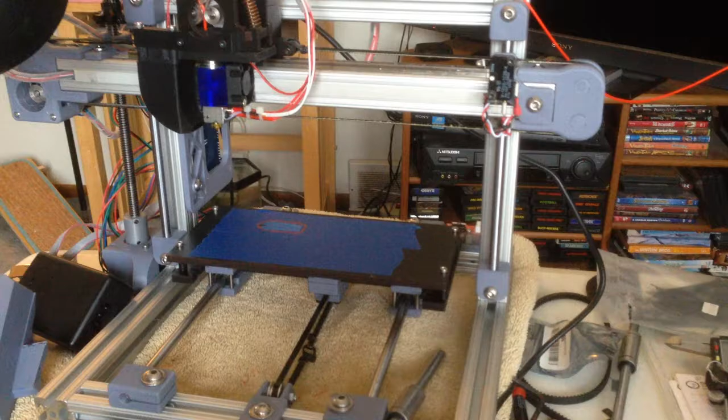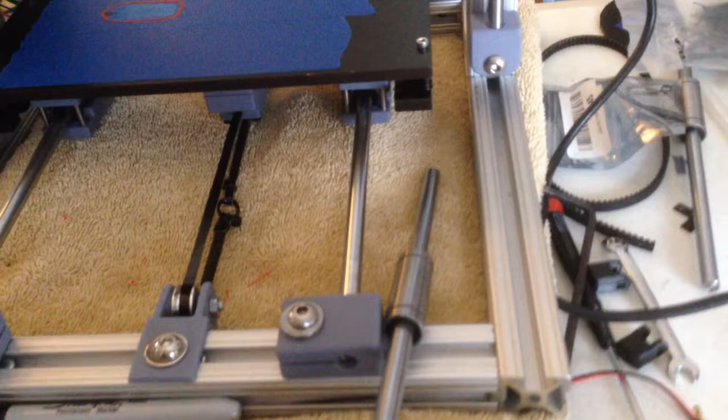We had a small amount of discussion last week, Tim and Ron and I, about how to best design parts for 3D printing to create something or build something. So I wanted to just real quick walk through the process that I used. Maybe people would find that helpful.

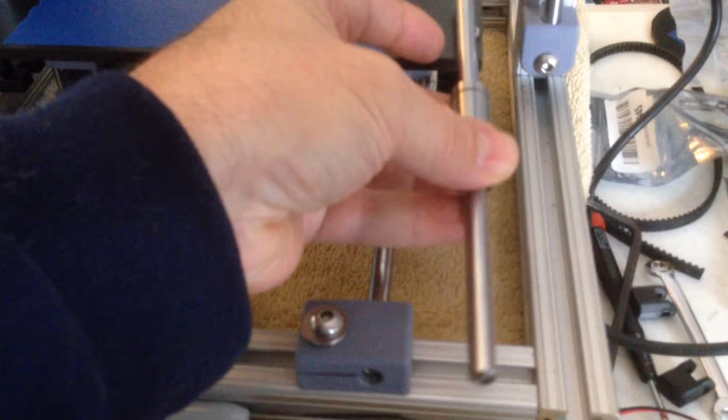So how do you take an 8 millimeter shaft and end up with a part like this here or these here that connect the two in such a way that when you print it, it actually works.

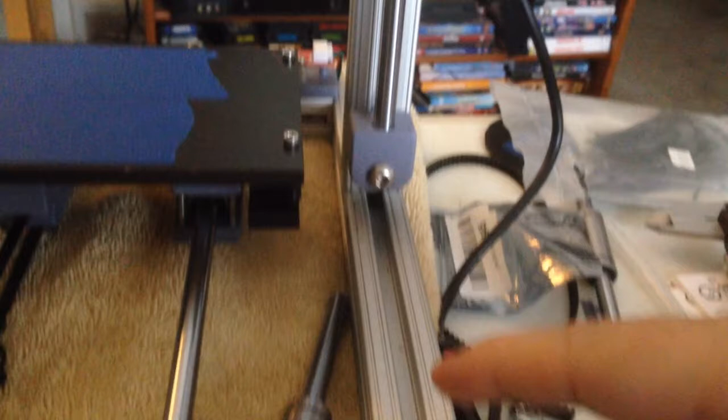So the first thing I do, and the whole process here is going to be that I actually create the parts that I want in my 3D modeling software so I can connect them together with another part. So my aluminum profile and my shaft and my bearings, all those kinds of things, I would take my caliper

and measure it and say, okay, my profile here is 25 millimeters square, my shaft is 8 millimeters, and my bearing is 15 millimeters. I would take those measurements and write them down somewhere, sketch them down if I had to, but then I would bring that over into my Fusion 360 modeling software and start to build it from there.

I'll go through some of what I think are key things to know while I'm going through how to make this part. So you start with a component, and you can build inside this component.

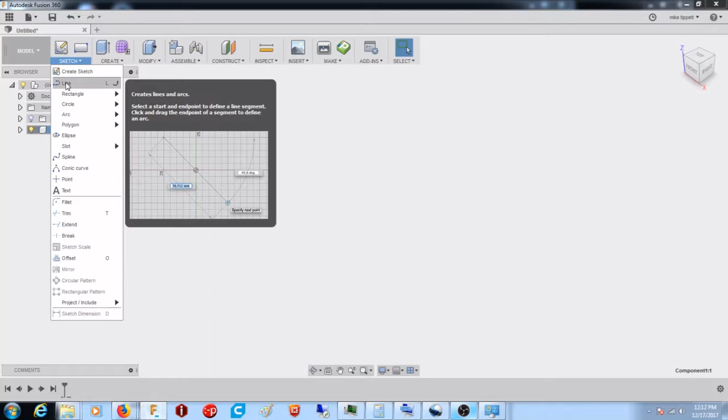So to create a part, you can click on sketch. You start every part by clicking on sketch. And you've got different options. You can draw a line or different types of rectangles, different types of circles. You can play with those. I'm just going to start with some simple things.

So I'm going to create a circle, and I'm going to create a center diameter circle. I could do a 2-point where it draws a circle between 2 points. You can figure it out. Okay, but center diameter circle, and then it wants me to know where to start drawing.

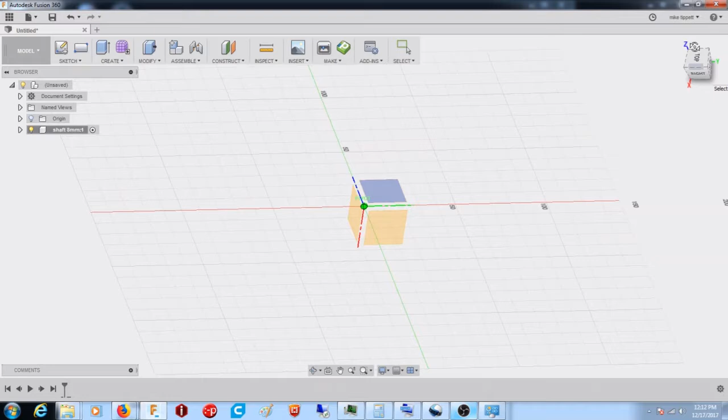So something that took me a while to figure out here are planes. It says select a plane or a planar face. So it's basically saying, where do I want to start drawing if I have a three-dimensional image? If I click on this thing here, you can click on it, drag your image around to show different perspectives of it. Or you could also scroll click on your mouse or trackball, and you can do the same thing.

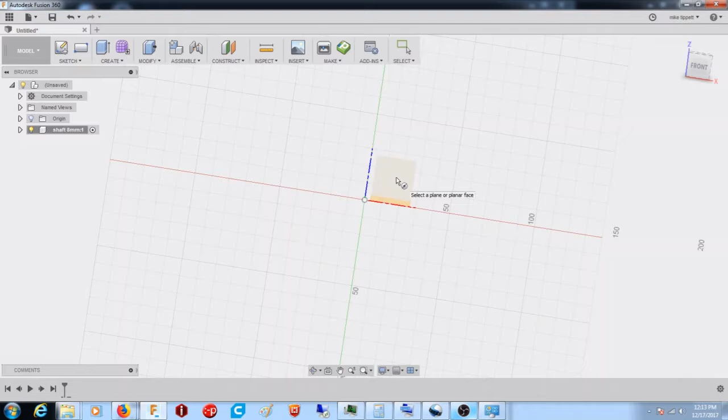So it's asking me, where do I want to start drawing? What plane, what surface do I want to draw on? If I had a cube here, what side would I want to draw on? So if I click top, I'm going to be looking top down on my part. If I started here on this one, I'd be looking at the side or the front of the part.

But I'm going to start drawing the shaft from the top. So if I click on the top here, it'll center everything for me. And when that turns from blue to yellow, I've selected that plane. I click it, and now this is the center of my drawing area.

So I'm going to click release to set my center point, and then it says specify diameter of circle. So I can drag my mouse out, or not drag, I'm just moving it because I released the mouse. But it also shows me the value of that, and when it's highlighted, I can just type a value and hit enter again, and now I have an 8 millimeter circle.

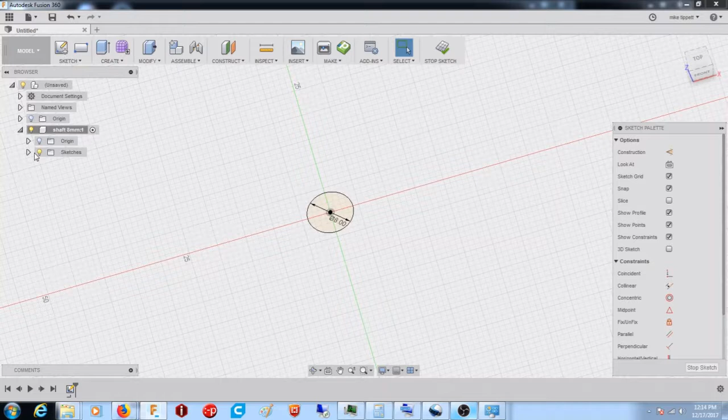I can use my scroll wheel to scroll in here. That's the easiest way, and click the scroll wheel to drag it around. So I've got a sketch. If I come over here to my part name here and expand this, I've got sketches here, and it shows me all of my sketches, and this is a sketch that I drew. I can click the little light bulb to make it disappear, which is handy later on, but that's my sketch.

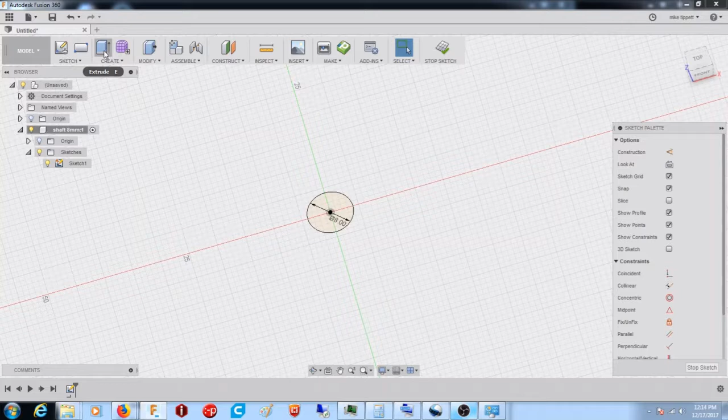I want to create an actual part out of this. I want to create a shaft, so I'm going to click on Create, and Extrude is the default. Like if I hit the letter E, it always gives you your shortcuts there. I'm just going to click Create and click release on that part, and it gives me an arrow here where I can click and drag that, and I can go in the negative direction or positive direction, doesn't matter. The text is blue, so I can type a value in there as well.

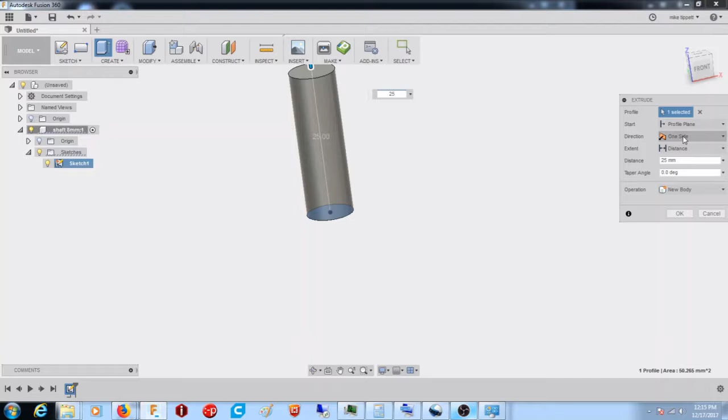I have different options over here, whether I can have a one-sided or two-sided or symmetrical. Symmetrical, it'll create a part on both sides. You can play with that, but there's my part. There's my 8mm rod. It's 25 millimeters long, so I've created that part. That's critical for making the pieces that I want to join this part to something else.

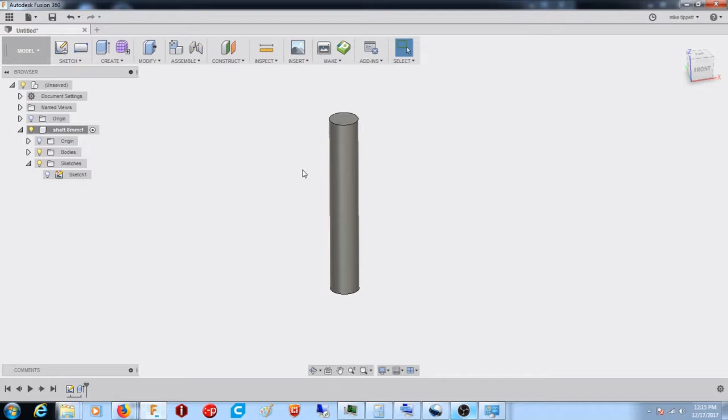So my bearing that I measured was 16 millimeters. So I'm going to come up here and click on my main part here and select New Component. So now I'm going to select that and call that bearing. So now I've got a new different part, and it still shows my other parts. This little Activate Component here allows you to determine which component you are working on at the time.

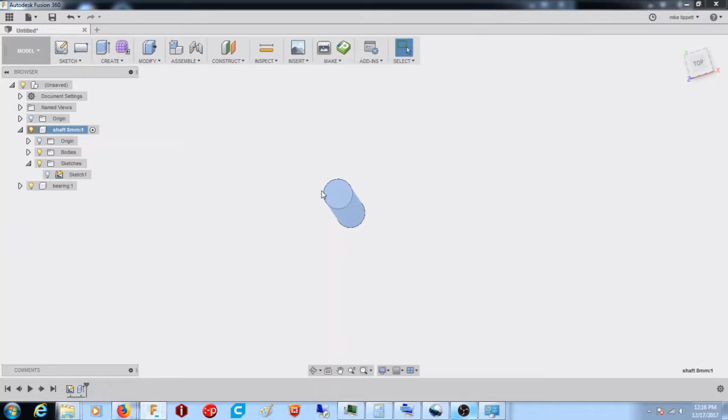So you see how my shaft is no longer activated. If I click that, my shaft changes color and shows me that it's the one I'm working on. But I want to work on bearing. So I'm going to look straight down on the top. I'm going to go to Sketch and Circle. I'm going to do a center diameter circle again, and it's going to ask me to select a plane or a planar face. So I've got two options here.

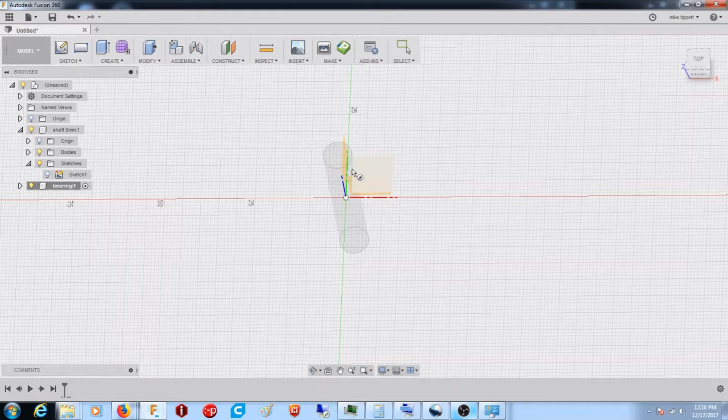I can pick this plane in my XYZ space, or I can pick the top of my part here. That's a planar face. It's a flat space, it's not curved, along a plane. It matches the same plane here. So I click that. Now it says place center point. I'm going to scroll in here, and you can see that I've got crosshairs in a square box, but if I hover that over the center of my circle there, it gives me a round circle instead of a square box.

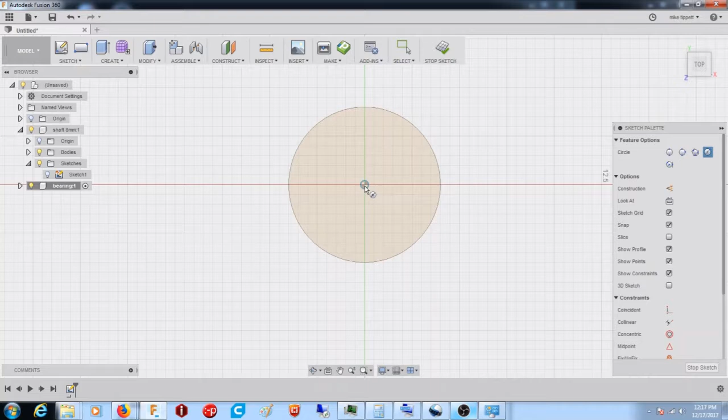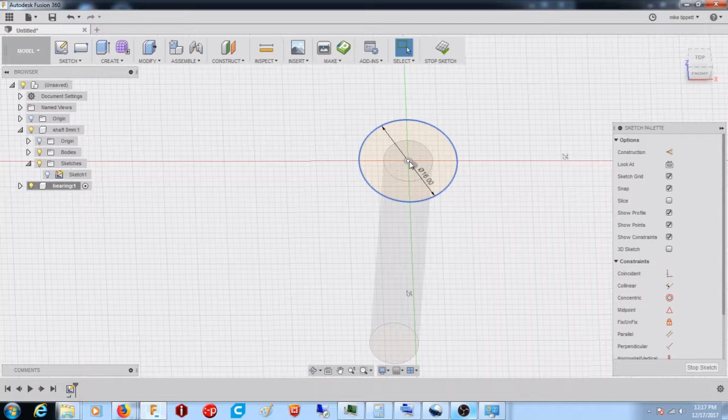It's hard to see. But place center point, I'm going to click, and I'm going to drag out here, and I'm going to make that 16 millimeters. So now I have, let me scroll out, a circle based off the center of the part behind it, and I can select that, and it's just the expanded part of that, not the inner part. I could make it the inner part, the shaft part, but I'm not.

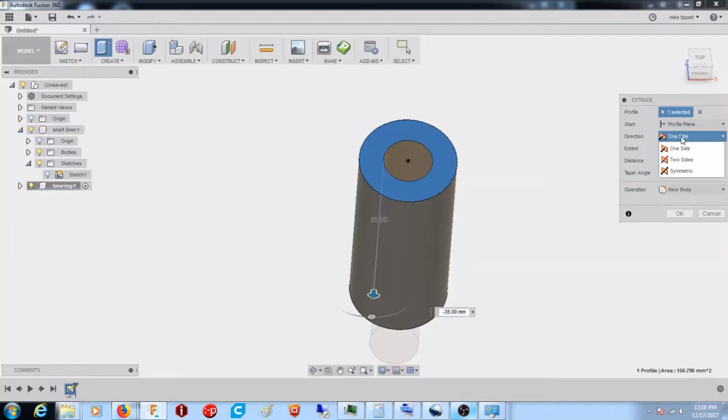So click Create and Extrude, and I'm going to extrude this down, and this was 35 millimeters, but if I wanted to, I could also make it two sides. Now I could extrude this way as well. So I'm going to make this 35 millimeters and hit enter. Oh, I forgot one key thing. No, I guess it doesn't matter in this case.

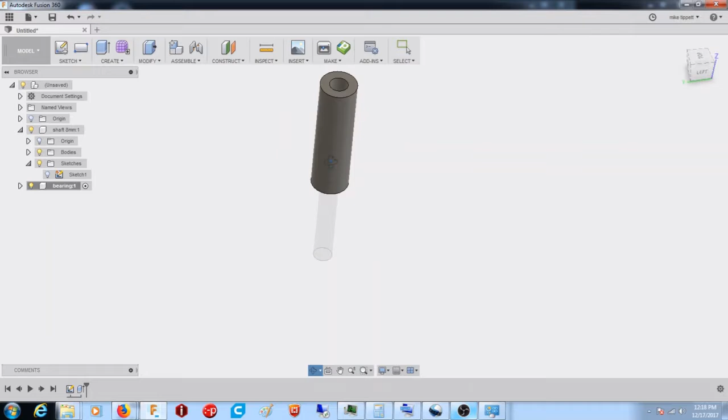Okay, so now I have my bearing, and I have my shaft behind it. I can select it, but I can't edit it. So here's my bearing. I want to move that bearing so that it is centered on this shaft. So I'm going to right click on it, pick Move/Copy, and I have the option to select a specific face of something, but I really want to move the whole thing. This is a body now because I have extruded my sketch into a body.

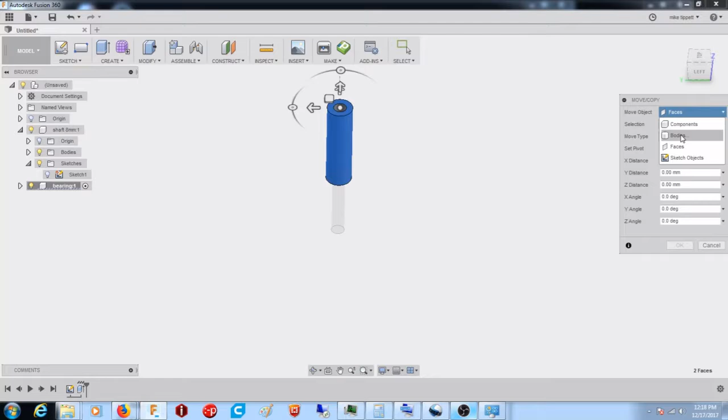So I'm going to select Body, and I'm going to center my view on it and click this arrow. Now I could rotate this body, I could do all kinds of things with it. I don't want to. I just want to slide it down so it's centered on the shaft a little bit more. Shaft's not big enough. So I'm going to click OK, and that moved more.

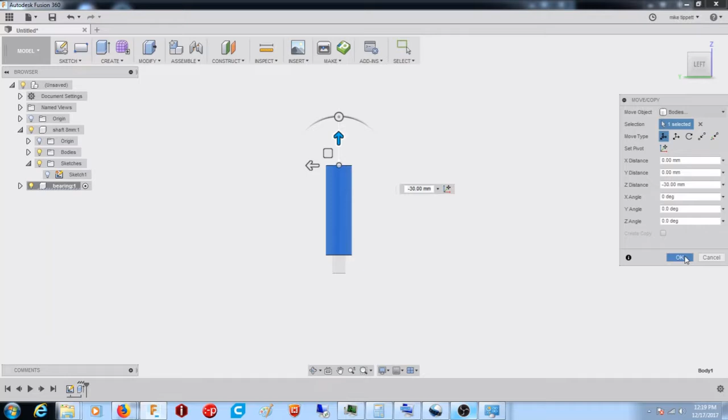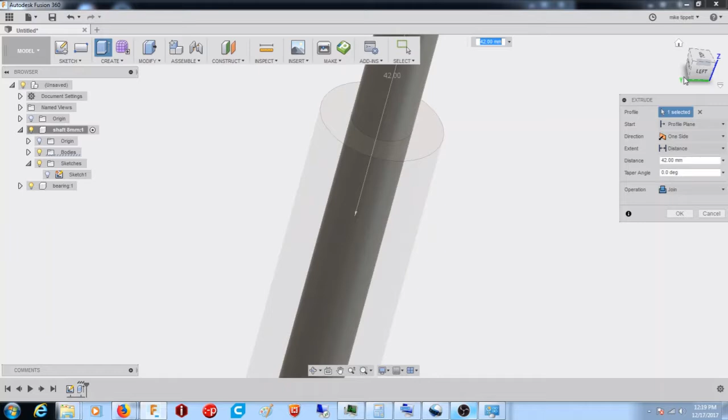So I'm going to go back to my shaft. I'm going to make that active. I'm going to scroll in here and click on the top of that. So just the top is selected, and Create. I'm going to drag that up so that it extrudes out of both sides of the bearing like that. Doesn't really matter how long this shaft is.

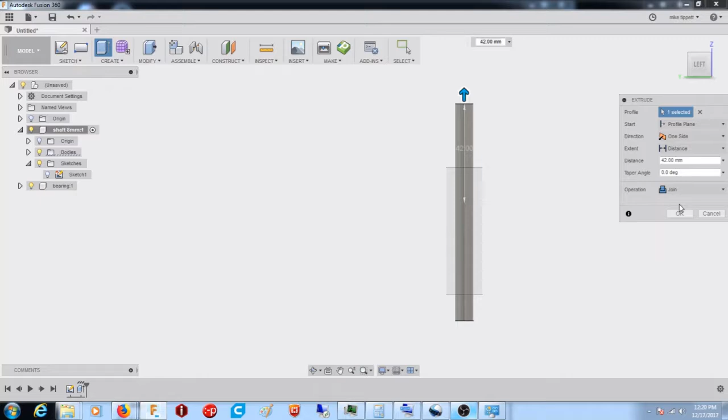And I'm going to join it to the previous part. If I said I wanted to cut, it would cut; I'll go back to that in a minute. I could join the previous part, or I could make it a new body, and there's a line separating them, so now I've got two separate bodies here. I want to join this to the previous part. So now there's my 8mm shaft. It goes all the way through my bearing.

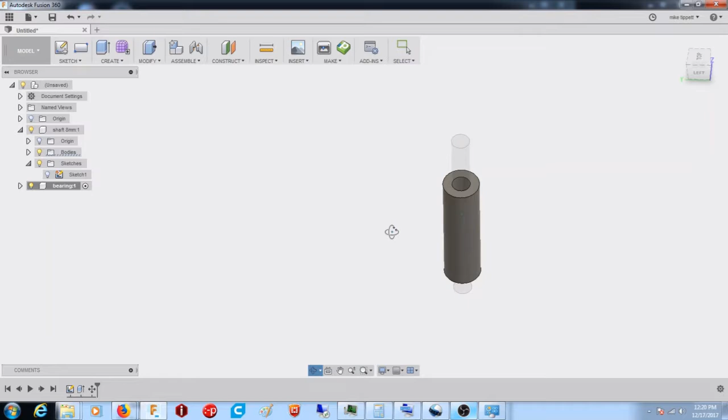If I select my bearing to make it active, there we go. So I've now created a shaft and a bearing that I can attach something to. So that's how I would build these parts, and then figure out how I wanted to attach them. It's a whole lot easier if the parts are right there on the screen and you can build from them, rather than trying to guess at what you're doing.

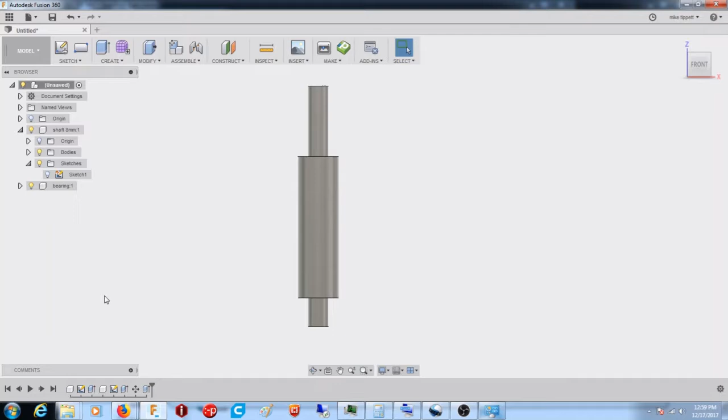All right, so now I've got my part. I want to put another part on there and join the two together. So I need to create my aluminum profile, which is part of my printer. So I made a new component. I'm going to call that profile, and now I'm going to draw that. So again, to draw a part, I want to pick Sketch. I'm going to pick a center rectangle this time.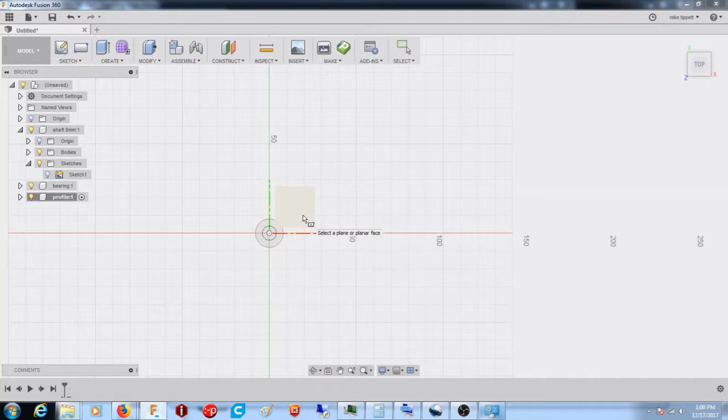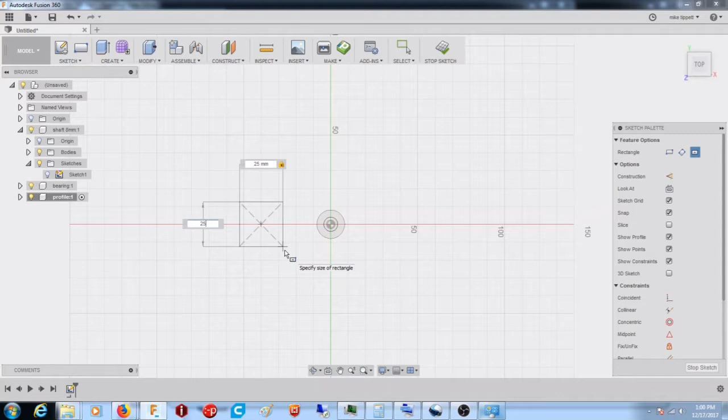It's going to ask me about a plane or a planar face, so I'm going to just pick my plane to click on, and I'm just going to pick a spot that's centered along the part here, to make it easier, and then specify size of rectangle. So I clicked, I moved my mouse, and I'm just going to type 25 and 25. That's the size of my profile. Hit enter, and now I have a sketch that is the size of the profile from the end.

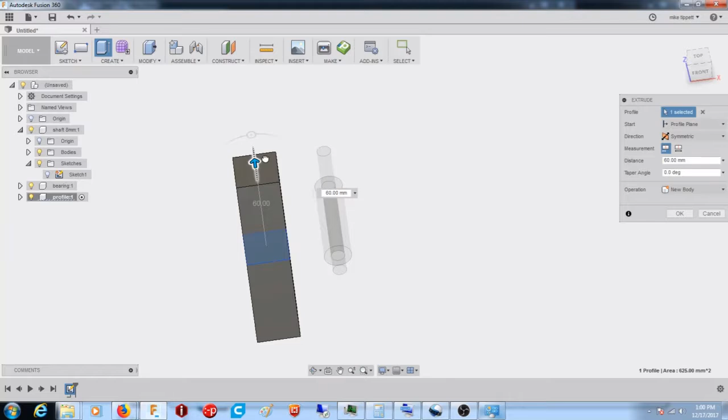I want to create a body from that, so I click extrude, I select it, and I extrude that into a body. I'm going to say symmetric, so it extrudes from the bottom and the top the same way, same motion. And I don't want to make this a new body. Oh yeah, this is a new body. I just created this. So click OK. There's my profile. So it's a representation of my profile. It's not very accurate, obviously.

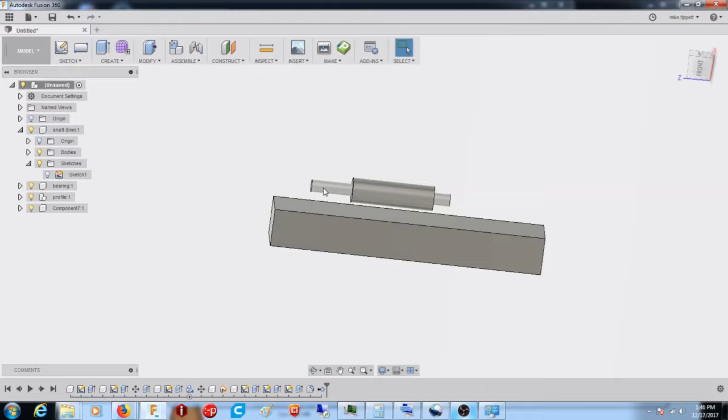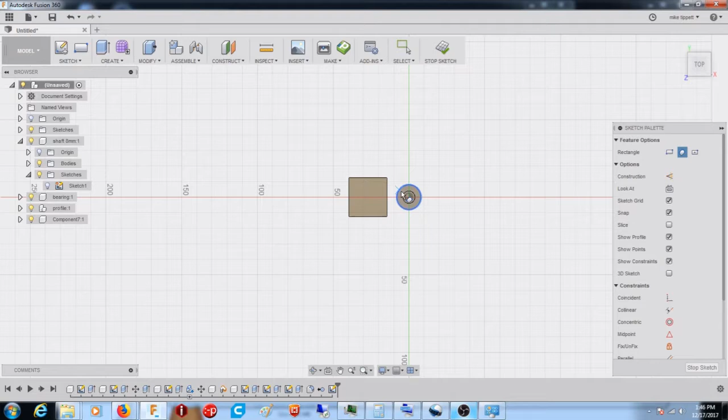All right, so I've got my aluminum profile. I've got my shaft. How do I connect the two together? Well, this is the methodology that I used as I was creating this. And so for every part that I made, this was the method that I used, and it worked really well for me. So I'm going to create a 3-point rectangle. I'm going to use the top of my profile as my planar face to draw on. And you can see how the cursor snaps into the corners.

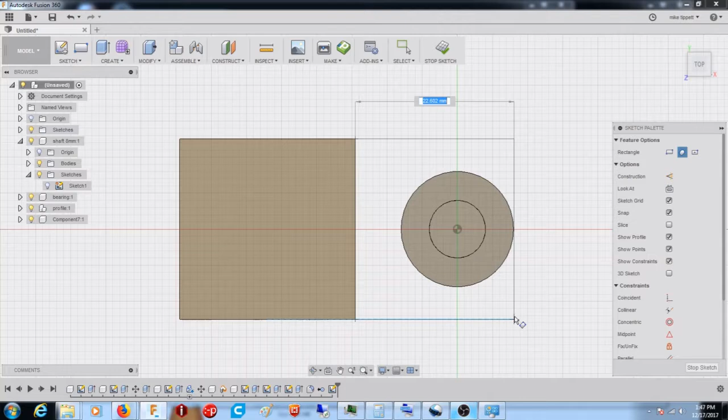So there's my first corner, I click, there's my second corner, and how big or small you make this part is totally up to you. You can change it later. You can edit the part once you've created it, so I'm just going to make it as far out as my bearing there. So I click, there's my face there, or my sketch. I'm going to stop my sketch.

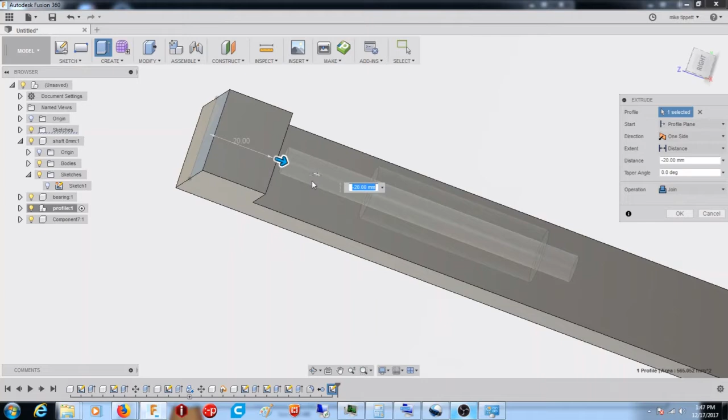I'm going to create that sketch into a body. So if I zoom in here, let me line this up. So there's the length of my extrusion here, or my extrude. So 23 millimeters, minus 23, is the edge of that shaft.

I'm going to decide that I want to go 10 millimeters into that. So I'm going to say 33 millimeters is how far I want to extend over that shaft end. That's probably plenty, so I can change it later if I want to.

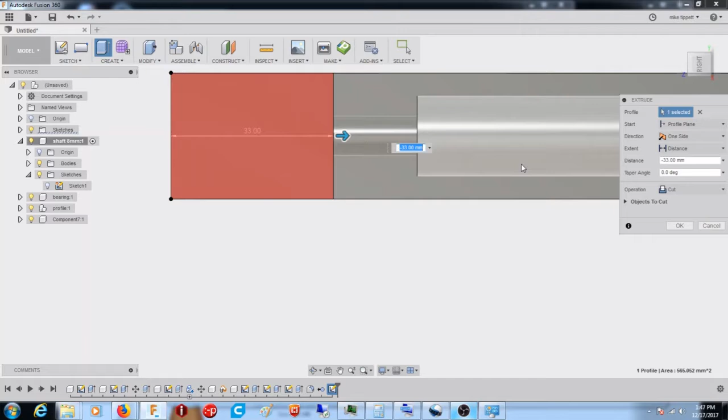So I don't want to cut. It's determining that because I went into a part, I'm going to cut. I don't want to cut, I want to make a new body right there. So that's my new body. I click OK, and it's separate from the shaft that's there. So, okay.

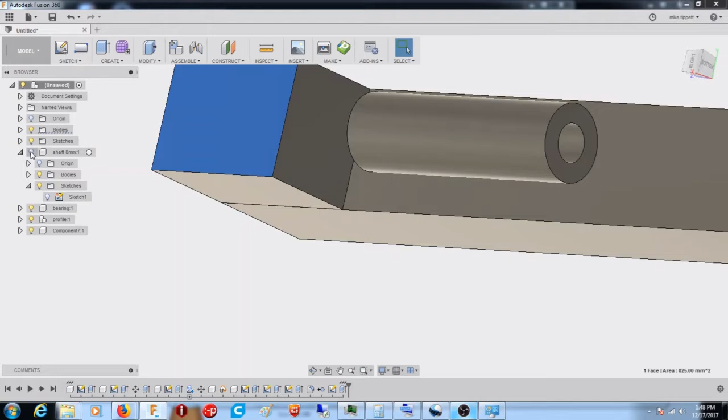If I make my shaft invisible, you can see there's actually no hole there. It just created a block. I want to actually make a hole for that shaft. So I'm going to zoom around to the top of my part here. Okay, I'm going to create a circle. I'm going to pick a 2-point circle. I'm going to pick the top of this profile here.

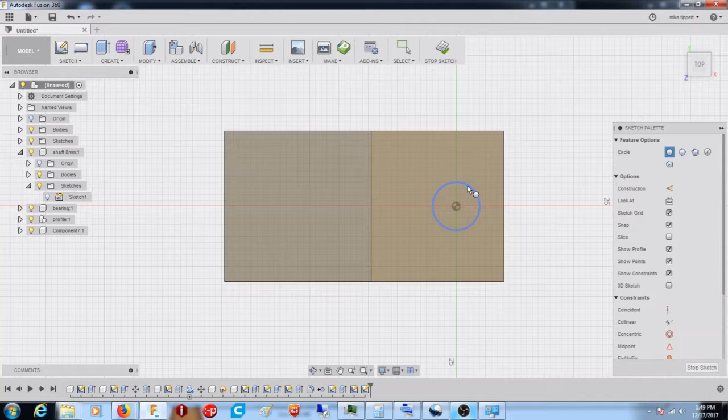And you can see as I move my cursor around, it's going to show me the edges of what's underneath it. So that's the edge of my bearing, that's the edge of my shaft. That's just fine, that's what I want to see. So I'm going to click on that, and it's going to draw this circle, and it's going to snap to that other piece behind it.

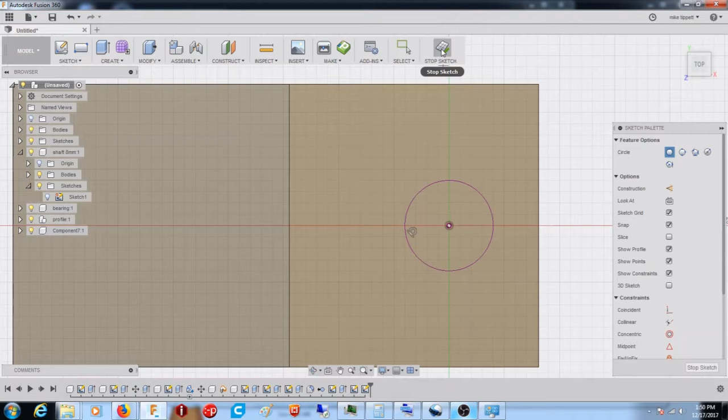Now it's 8 millimeters, which is the size of my shaft, so that's perfect. So all I have to do is type 8 millimeters, or I can just click on that once it snaps to the outline behind it. And I'll stop my sketch, and there is a sketch the same size as my 8 millimeter shaft. I'm going to create... There we go.

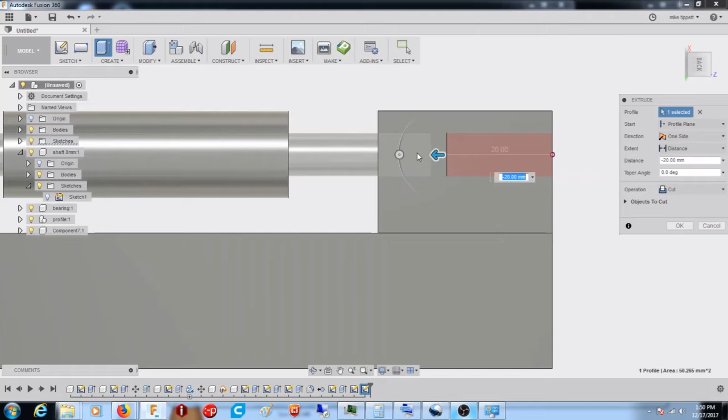And as I move back into this part, if I move this way, it would make a new part and join to this block, or I can move back into it and it automatically assumes I want to cut. So 33 millimeters was where that shaft started. That was the number I had. I'm going to make it 20 just to give myself a little buffer room there in case I need to fudge something a little bit.

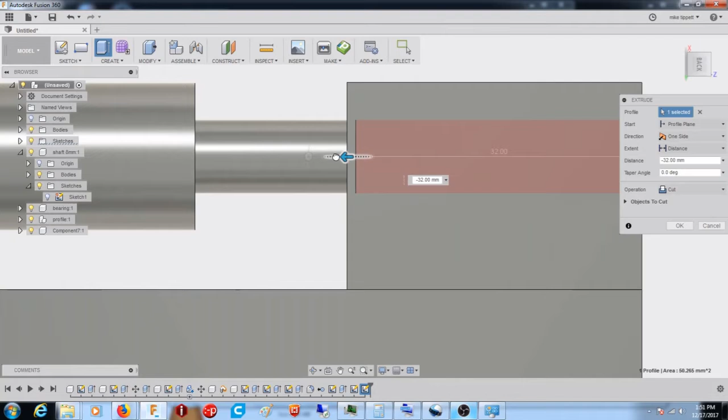So you can see the edge of the shaft right there, and here's where my... oh wait, no, I need to go all the way to it. What am I doing? So I need to go all the way through this, and I can drag this body all the way through, but it's going to cut off part of my shaft if I do that, and if I decide later to change the size of this block, this 32 millimeter extrusion is going to be the same. So I could later change the size of this block and this hole might not go all the way through it.

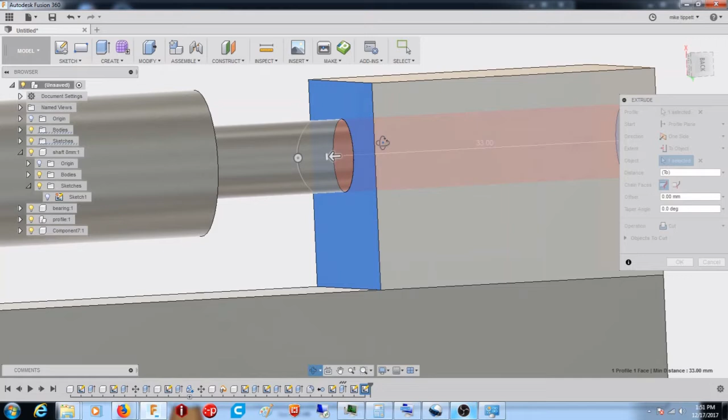So what I want to do is instead of distance, I want to pick to object. I want to pick the edge of this object, so that extrusion always goes right to the edge of the object. Even if I move it later, it'll still follow that. So it's totally fine. That's what I want to do.

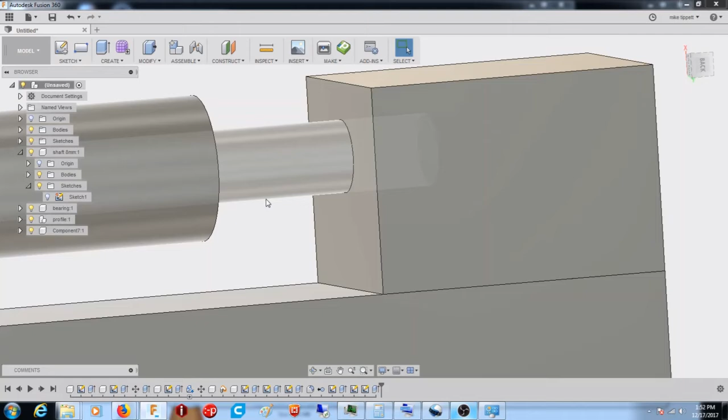Now again, if I click OK right now, it's going to cut through that shaft as well. I don't want that, so I'm going to make my shaft invisible, and now when I click OK, it's only going to cut what is actually visible right now. I'll make my shaft visible again, and it fits all the way into that hole, but it didn't cut through it. So I learned that the hard way. So now I've got a hole that goes all the way through my block there.

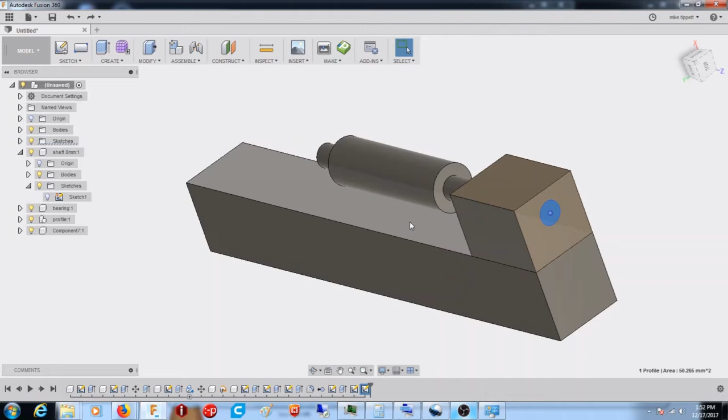There we go. So now, did I want it to go all the way through the block? I actually didn't, because later on I'm going to have to put a hole right here that goes down into my extrusion. So I'm going to undo that. There we go. I'm going to click that. I'm going to create. I'm going to say 20 right there. And I'm going to make this, instead of one-sided, two-sided. Oh, wait.

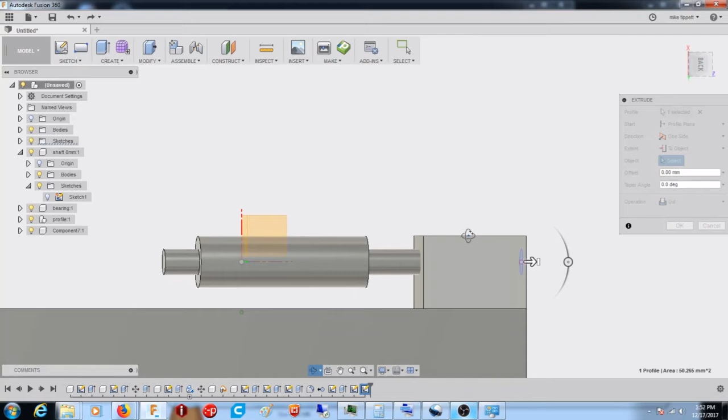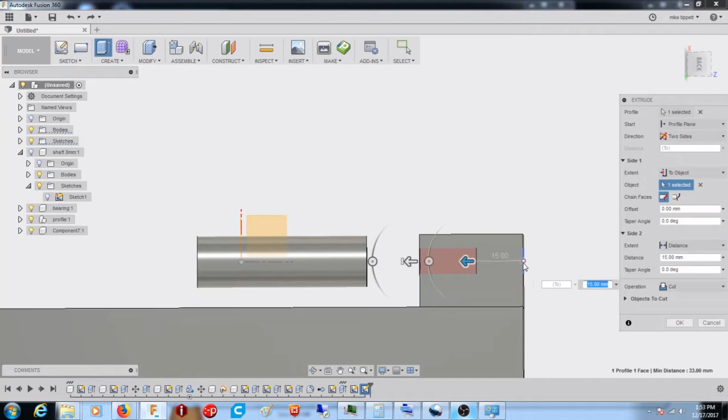One-sided. I want my extent to be to object. There we go. Let's go ahead and make my shaft invisible so I don't forget. And now I'm going to make it two-sided, and this side I'm going to make it go in, let's just say 15 millimeters. All right, it's going to be a cut. There we go. 15 millimeter hole. Only goes in not quite as far as the shaft.

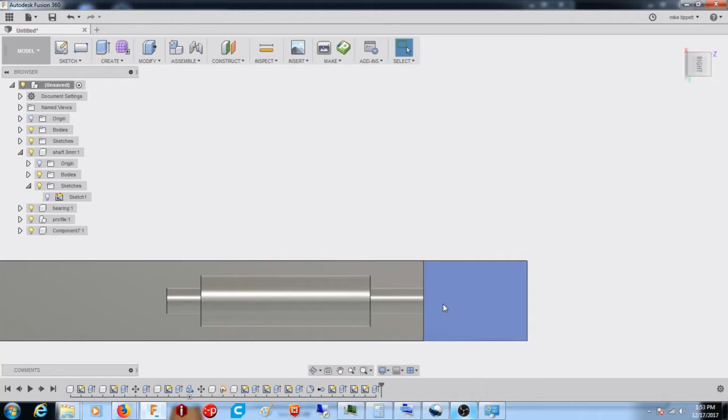So there we go. So now I need a hole through the top here. Okay. So let's see. So an easy way that I have found to create a point for a center hole is I'll go to Sketch and Rectangle. I'll make a 3-point rectangle. I'll use this face to draw on.

And I'll click on this corner, and this piece is 25 millimeters wide, so 12.5 is the halfway point. I'll click that, and I went 15 millimeters, let's see, 15 this way. So just to keep things centered, I'm going to type 7.5 millimeters and hit enter. And that right there is my corner where I'm going to put my circle. So I can click, and there is my spot.

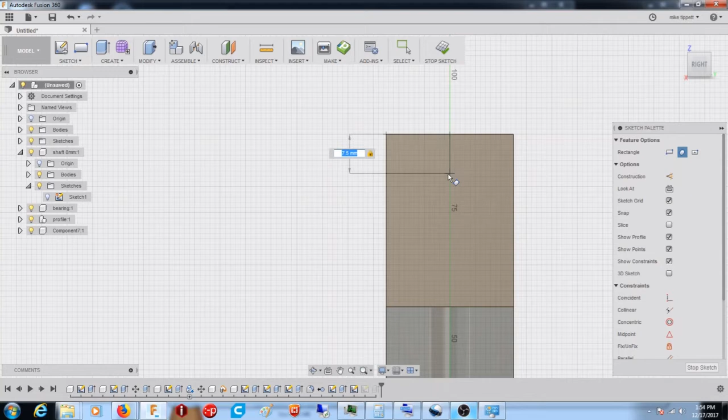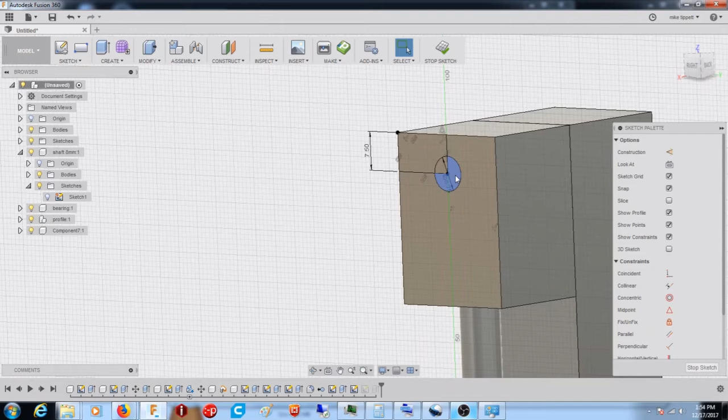I'm going to pick circle, center diameter. I'm going to snap right to that. And 6.75 has been the optimal size for me for printing holes through these blocks that my 1/4-20 screws can go through. So you'll see that it split it into two sections there because of the rectangle. Doesn't matter. Create extrude. I can click that, and it allows me to select more than one. So now you see over here it says 2 selected. 1, 2. I'm going to extrude that.

Now, what I want to do is extrude it just like before. I want to pick to object, and I want to pick it to the back side of this, but I can't see it. Neat feature about this is if you hold down your left click, it will show you all the faces and features that are underneath wherever your mouse is, and you can see the colors change a little bit. So there's the face, the back side of the profile, and you can see things changing.

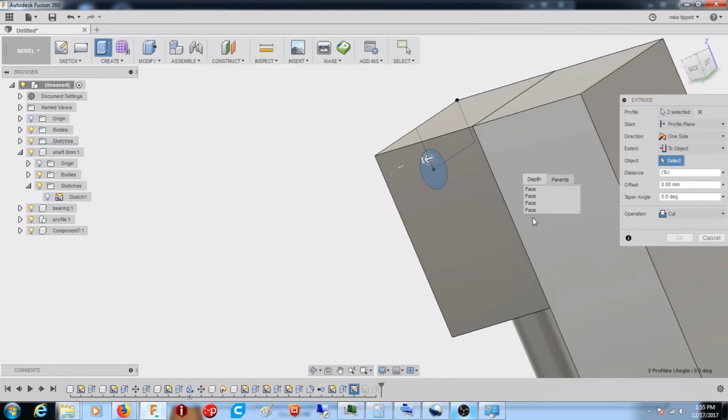I think right there is the back side of my block. There it is. So now it'll only go to the back side of that block and not cut into my profile. Click OK. Now I've got my hole all the way through. That's a functional part right there. You could call it done, or I could make it look prettier. I could add a chamfer to my edges here if I wanted to. A chamfer is just an angled edge. If you want to add something like that, you can.

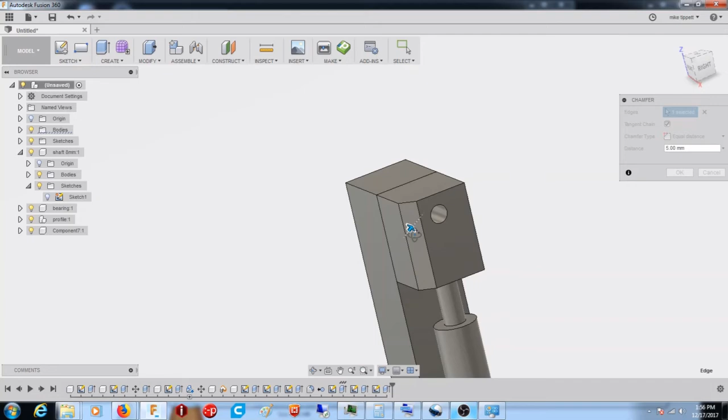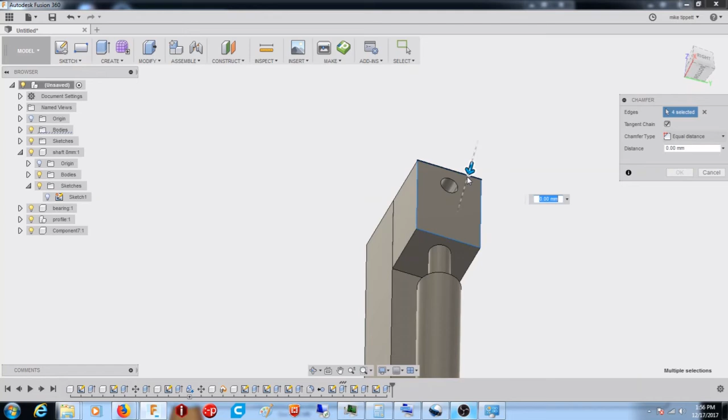You can add that to multiple surfaces at the same time if you want to. So unselect that and click those edges. Oh, the chamfer won't let you do that. Well, let's try again. Modify, chamfer. There we go. So I can select all my edges that I want to chamfer. Chamfer maybe, depends on where you grew up, I guess. And I could change that as I want to. So chamfer is a good one.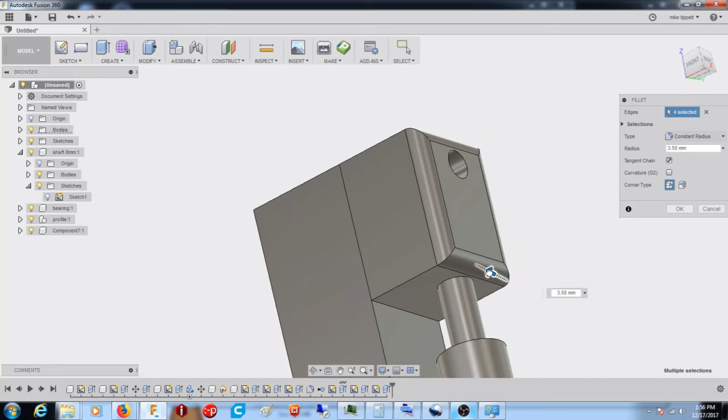I personally prefer the fillet. A fillet is a curved surface, kind of a rounded surface. So I like that. I have been liking that curved surface. It makes it look more like it's a mass-produced part rather than just something you cut out of a block. So you could add that fillet wherever you want to.

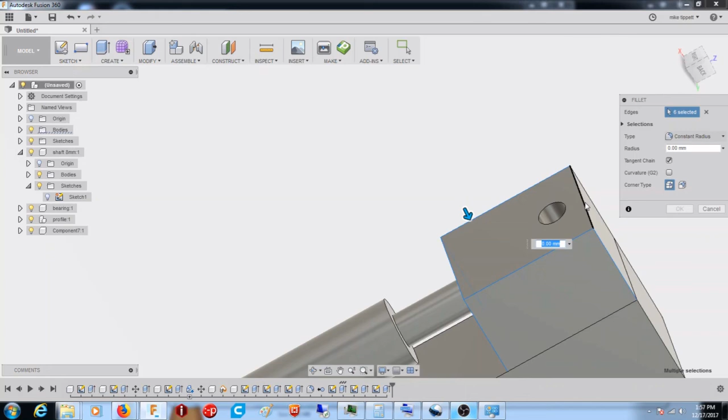If I wanted to add it to all of my edges here at the same time, I could. You'll see that there's a line in the back corner there. I can't actually see it, but it knows that I want to add it, so it's letting me do that. So I can add that to all my pieces.

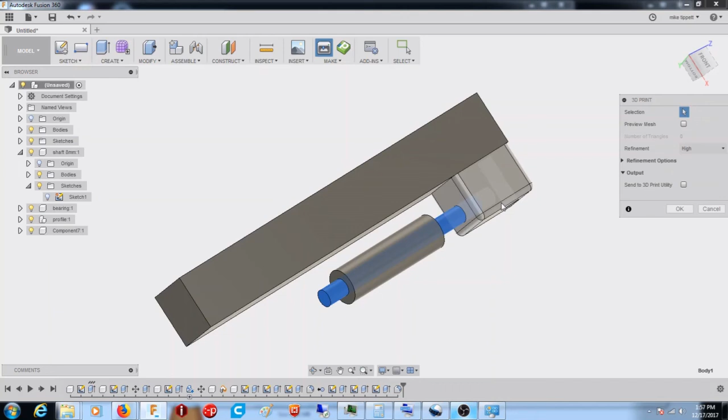There you go. So that was the process that I used for joining things together, was simply to draw the two pieces that I wanted to join, and then I just put blocks and circles and whatever between them and cut away what I didn't want until I had the shape that I needed. I can go to Make, 3D Print, select the part that I want, and select OK, and give it a name, and it creates the STL, and you're done. Hope that helped.